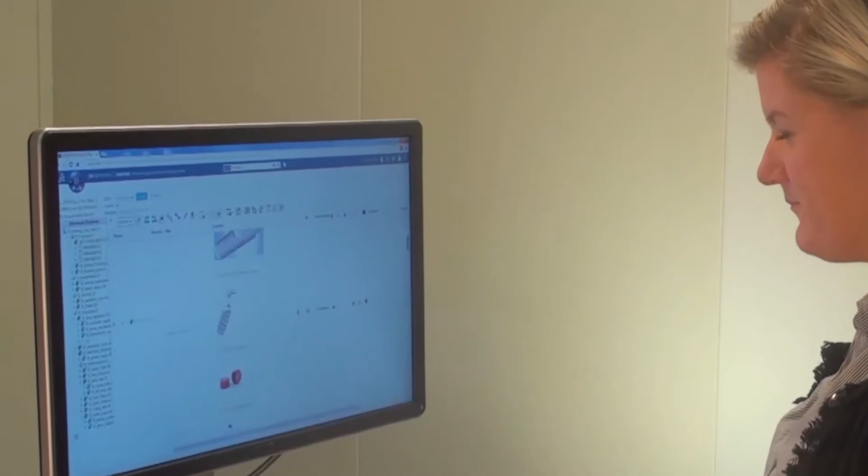Let's see how the 3DEXPERIENCE platform brings an innovative way to study and manage design changes. We begin with Joséphine, responsible for machine design. She retrieves Julien's requirement among all product requirements and starts with a functional analysis.

Here we see the definition of the machine's major functions. Each function is designed to satisfy a group of requirements. For example, this function is composed of several sub-functions that represent the different operations the machine must perform: rinse bottles, fill, cap, and label them.

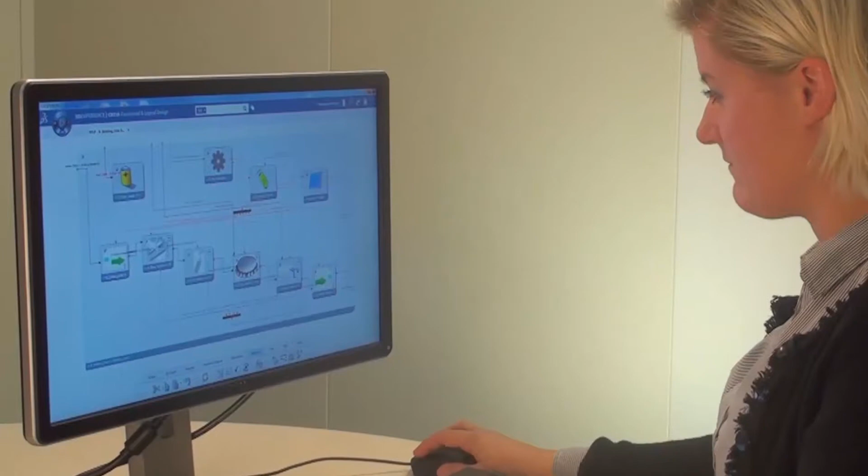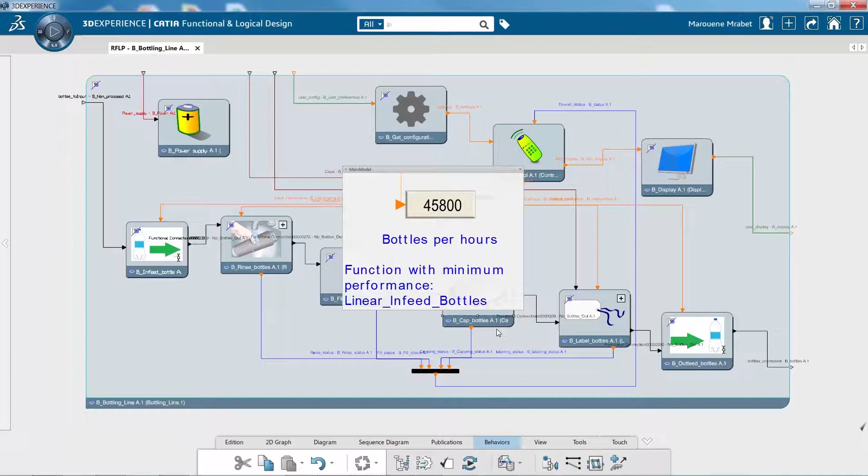Joséphine simulates the behavior of all these functions in order to check the theoretical performance of the machine and to understand which system is the most limiting. The result indicates that the function linear in-feed bottles does not allow a pace higher than 45,800 bottles per hour.

Joséphine will replace this linear bottle handling function with a new one which handles bottles using a rotating mechanism. Thanks to a catalogue of approved functions, she's able to replace this one by another more powerful one.

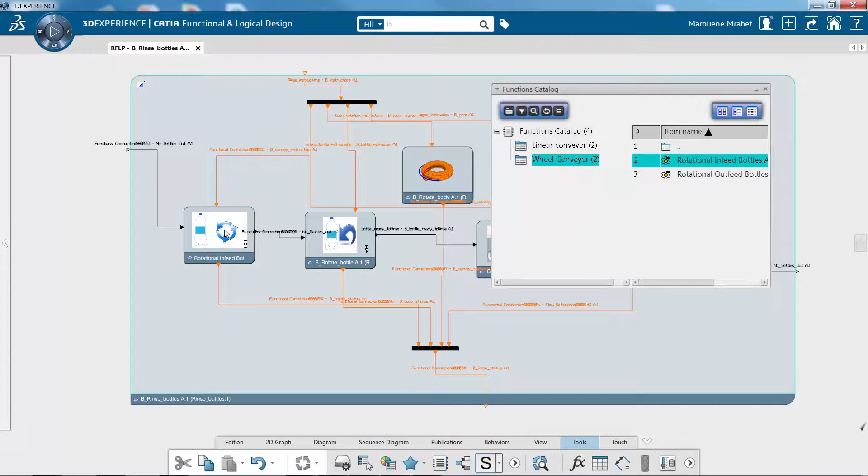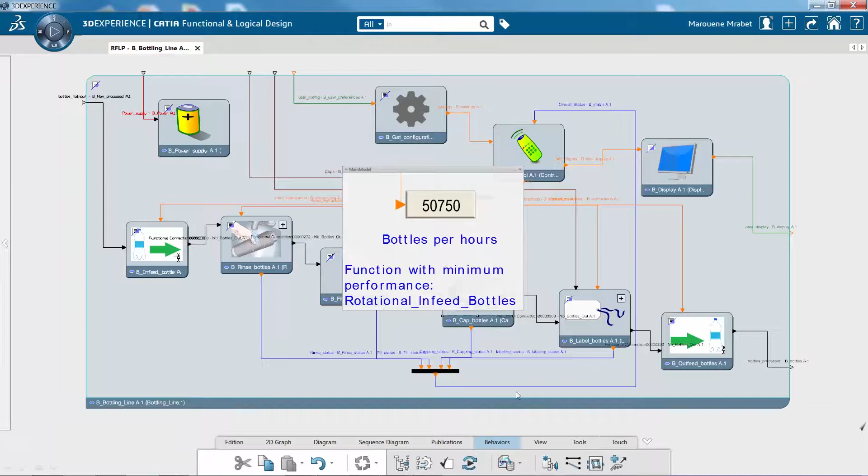She reruns the simulation to see the new machine capacity. The result is above 50,000 bottles per hour, which is in line with the request. Joséphine's simulation proves that she could launch the design change for this standard machine.

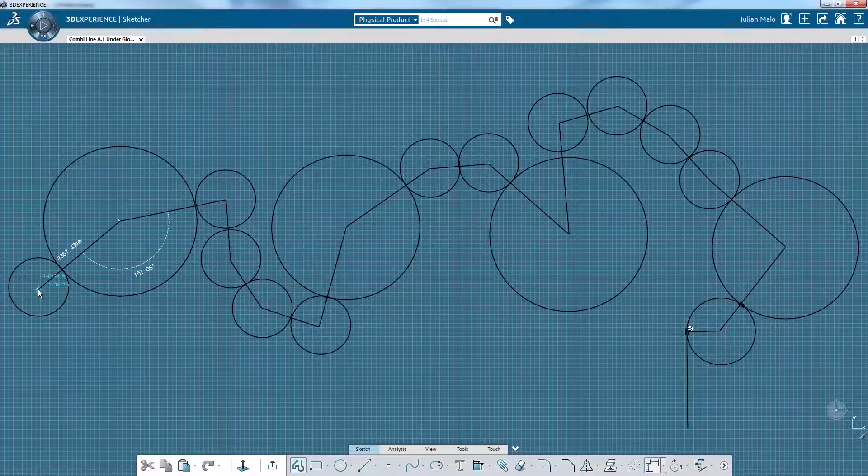Let's go back a few months when the machine was designed using the 3DEXPERIENCE platform. It began with Yves, the chief mechanical designer, whose role was to define the layout of the machine. For this project, a new technology for handling bottles was developed. Synchronized wheels instead of conveyor belts between rotaries were used to avoid bottle congestion and to drastically improve performance.

As you can see, thanks to an intelligent design, Yves optimized the way the machine rinses, fills, caps, and labels bottles. Due to the complexity of this type of product, Yves works in collaboration with his colleagues like Issam.

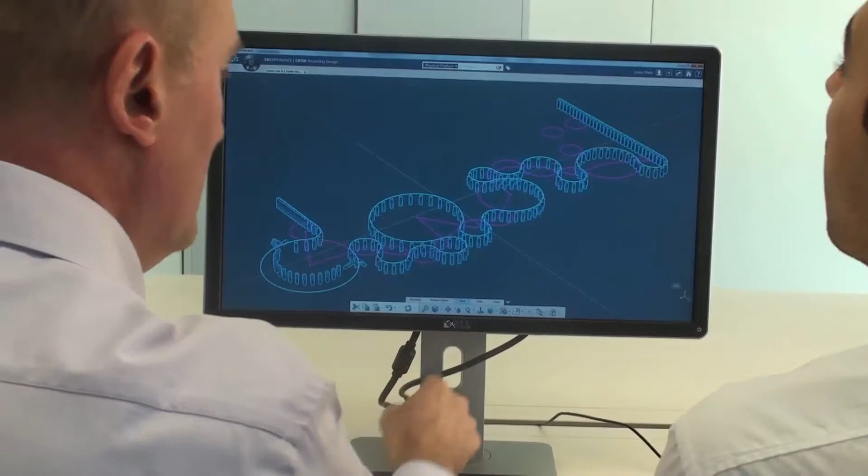They're discussing which parts could be reused. Their modular design approach maximizes reuse of existing parts. Design time is drastically reduced and the quality is improved. Advanced research tools simplify the retrieval of components. They're positioned by dragging and dropping them on the previously defined skeleton.

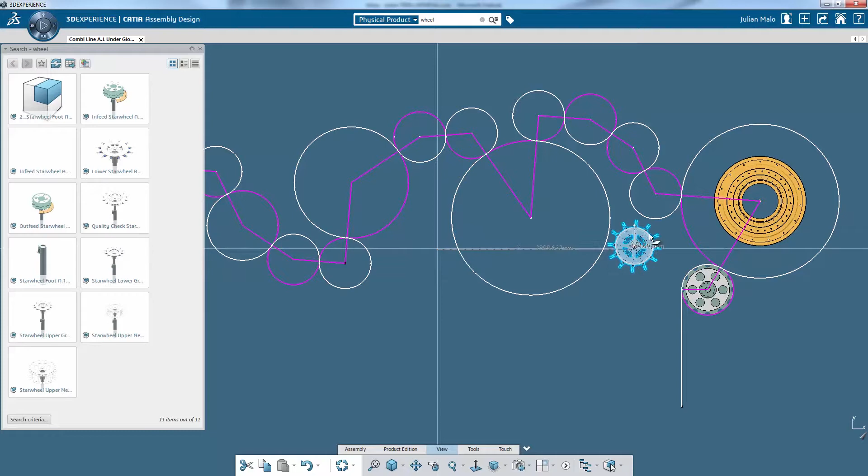In parallel, Issam works on more specific parts, such as the rinse module. By working concurrently on the same 3D digital mock-up, they were able to create this new combi line.

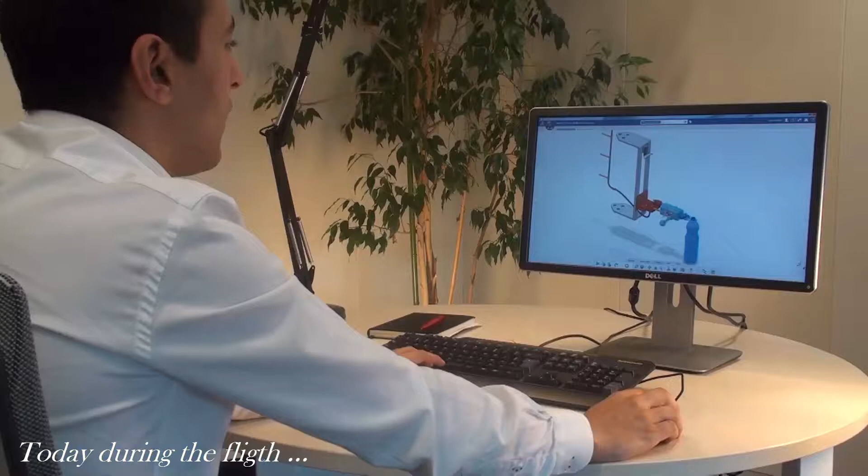Let's come back to the present now to see how the change requested by Julien will be taken into account. To deal with the higher rotational speed of the rotary, Issam will need to make some adjustments. For instance, he adds a protection on the rinse module to prevent bottles from being ejected during handling.

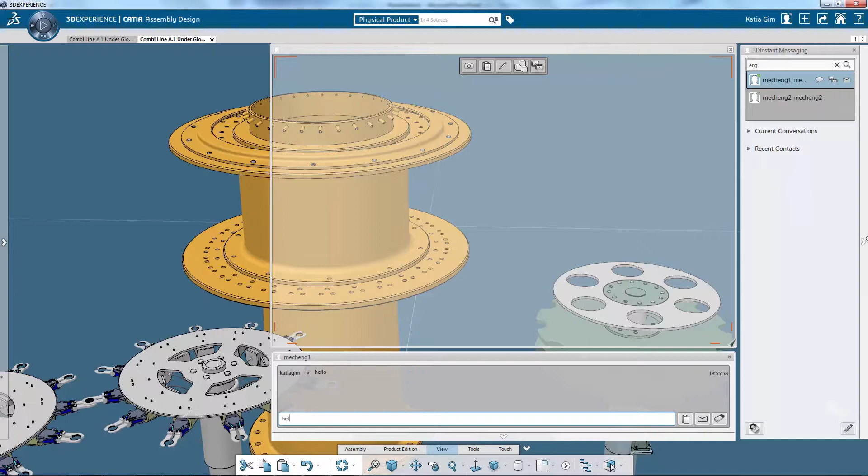In parallel, Yves replaces the linear conveyor module by a rotational wheel module. By chatting in his working session, Issam informs Yves that the new rinse module is now available. Thanks to the 3DEXPERIENCE platform, they're able to share their data and share more details over the phone.

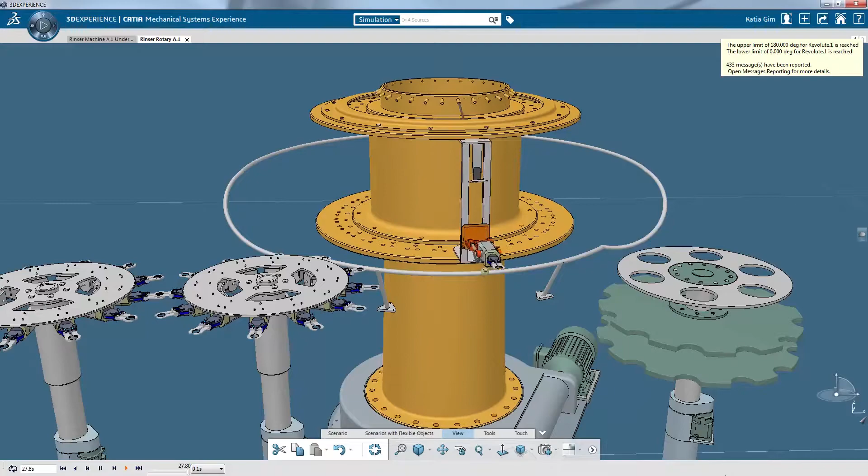Issam manipulates the model remotely. Yves understands the behavior and verifies the kinematics in the context of the adjacent modules. The design change is therefore done with a minimum number of operations, and it's now time to validate the behavior of this machine.

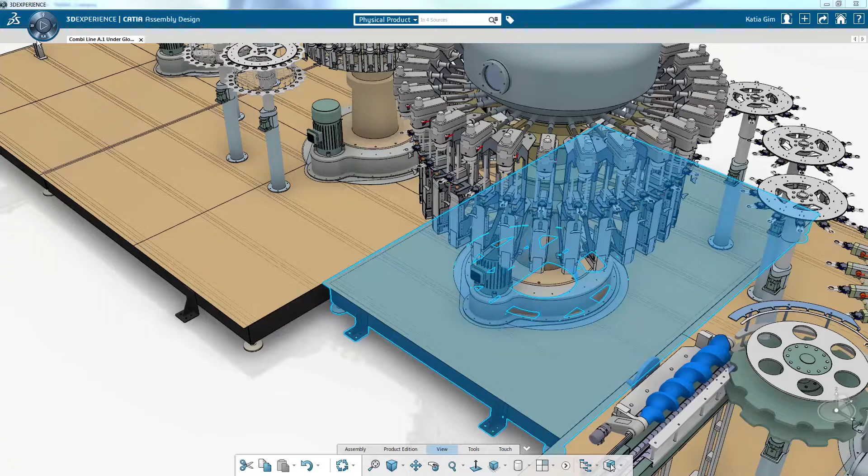This is Lening's job, the simulation engineer. His first task is to check that the framework supports the rotary loads under all types of conditions. With the south quadrant of the compass, he accesses the finite element analysis applications and validates that the structure is strong enough. As you can see, there are no boundaries between the engineers and the analysts as they're all working with the same data.

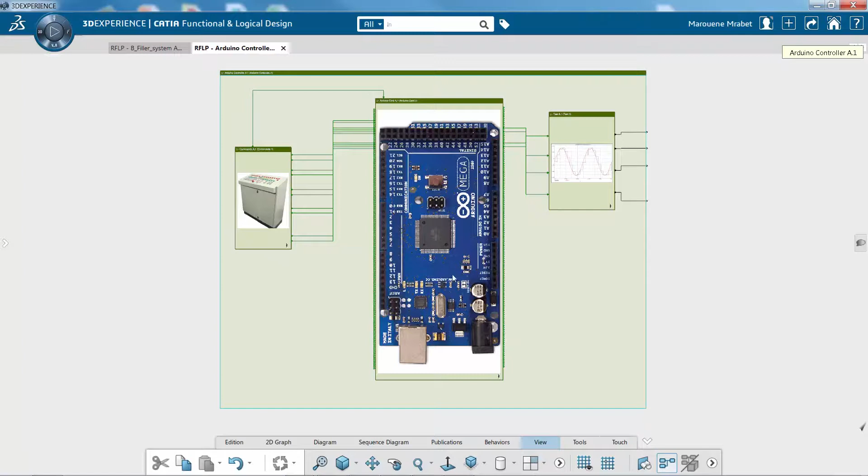Lening must also ensure that all components are well synchronized. The behavior of all hydraulic and electrical devices has been modeled. He can launch the simulation of the controller and verify the result. The real controller of the machine can be connected to the digital mock-up.

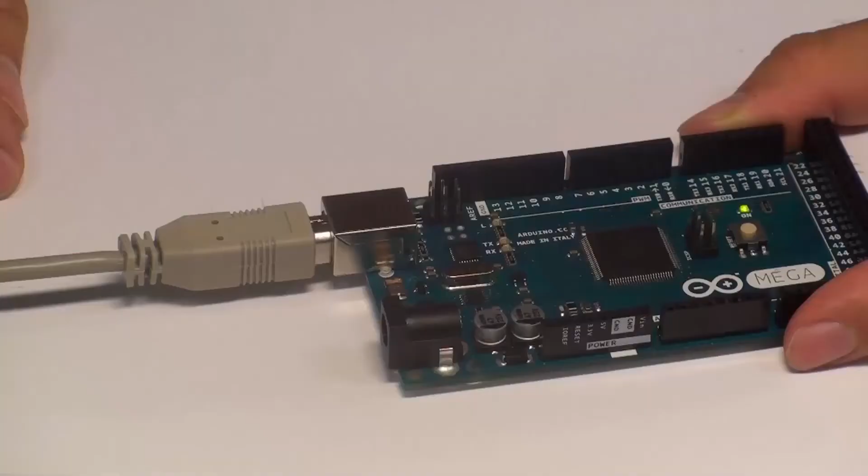Lening can thus validate the real behavior on a virtual model, which accelerates validation of the commissioning phase earlier in the development phase.

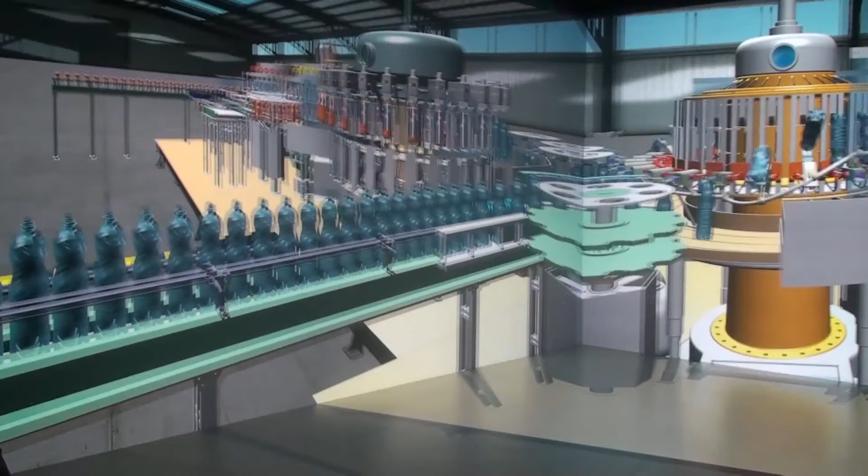In an immersive environment, the product manager visualizes the machine in real scale and can identify potential malfunctions.

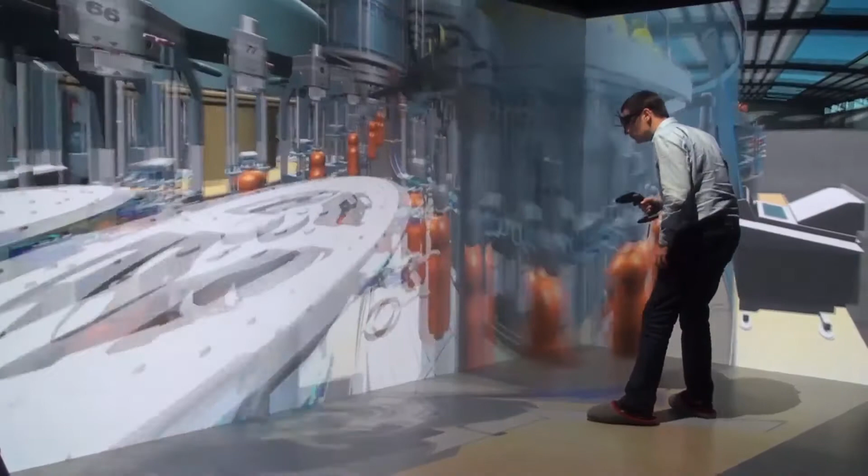In the meantime, Julien is now about to reach his destination. A final design review between all stakeholders will enable them to certify all design changes. Navigating using turntables allows them to visualize in detail all the machine's parts.

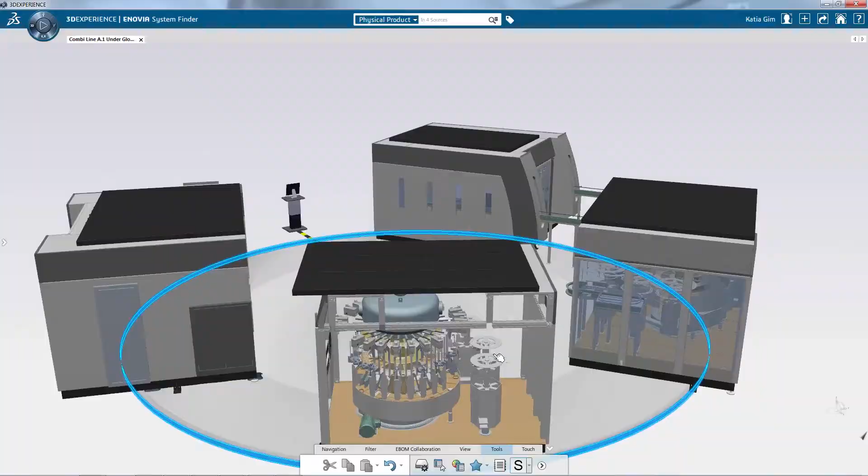Lening, who's located in China, can interact in real time with his colleagues from the Paris office. All actors view and understand each detail. Color coding indicates different information, like which parts are reused or not, where the interferences are, or to compare changes. This helps them make the right decisions.

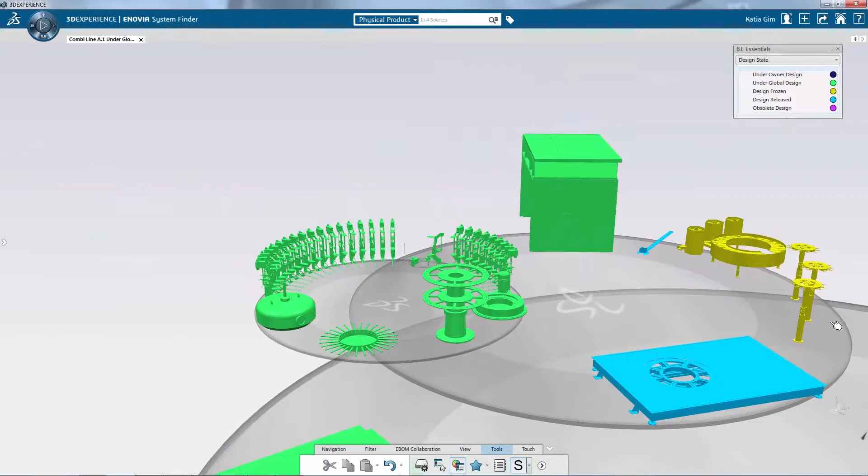Satisfied with their work, they decide to put this new version of the combi line for sale. Julien is notified upon his arrival that he can now propose this new version to his client.

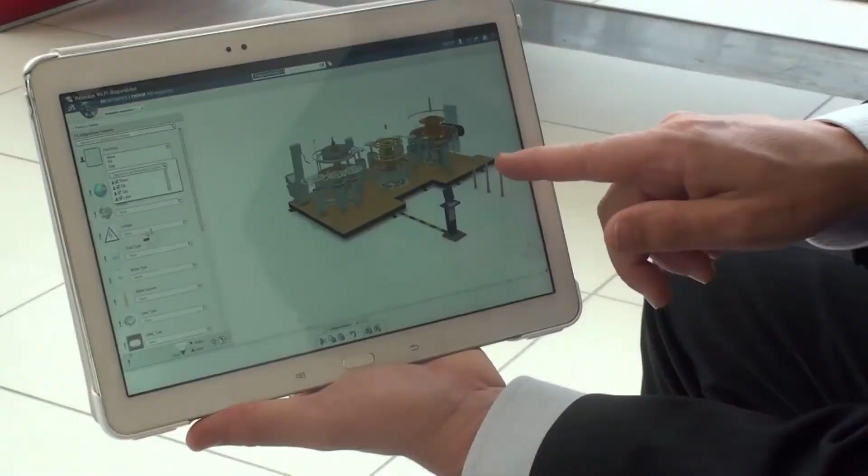Philippe, VP at Crystal Spring, knows exactly what he wants for his new plant. Julien connects to the 3DEXPERIENCE platform to access his company product portfolio and to directly configure the machine to meet

Philippe's expectations. For example, if he wants to fill large 2-liter bottles, the configurator proposes the adequate model for bottle sizes from half a liter up to 2 liters.

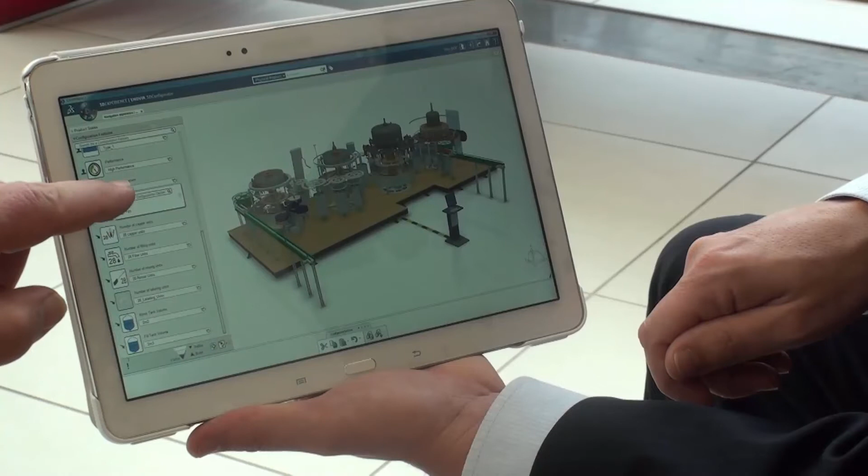Philippe is very impressed, and even more so as he himself can change the options in real time. The discussion between the vendor and buyer is simplified. They're speaking the same language, with 3D to support them during their discussion.

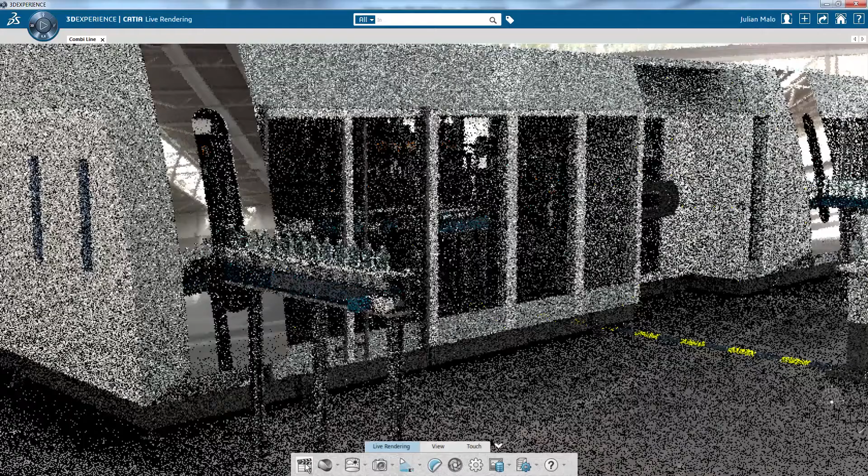Finally, since the configuration meets all the client's requirements, Julian uses realistic rendering to show how the machine will look in Crystal Clear's factory. This instantly triggers a positive emotional response from Philippe, who closes the deal.

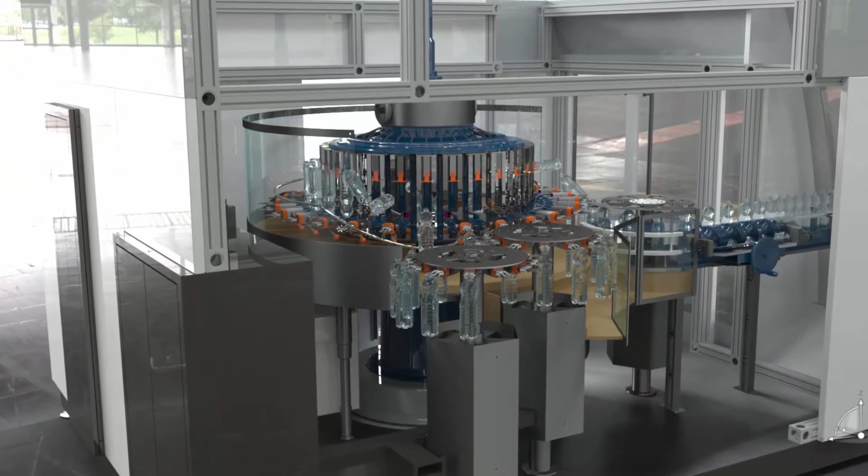In this journey, we've seen how easy it is to do business in the age of experience by connecting all stakeholders of the company, from sales to engineering, and enabling them to collaborate in real time on the 3DEXPERIENCE platform across the globe. The 3DEXPERIENCE platform definitely allows you to simplify and accelerate your business.